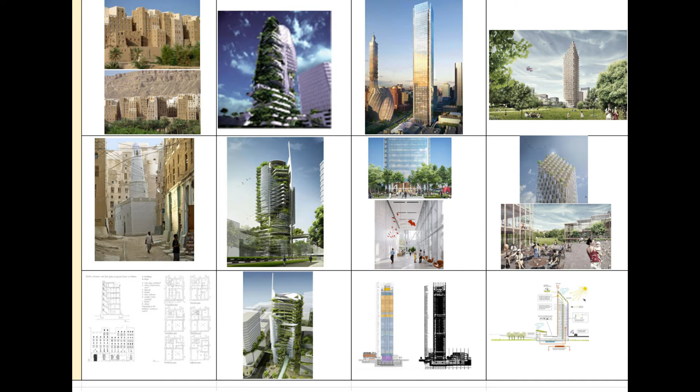So this study discusses high-rise and sustainable development. Besides this, a discussion of green skyscrapers and transportation. Moreover, we'll explain more about green high-rise and public spaces, and social and ethical issues.

So the abstract: high-rise buildings and skyscrapers have become increasingly important in the development of urban planning and environmental challenges. Many ecological factors have been included in skyscraper design. However, they still need to be more efficient to be labeled as eco-skyscrapers.

As a result, this study clarifies the tendency of architects like Norman Foster, Yeang, Renzo Piano, and others who are attempting to achieve the concept of green skyscrapers. These architects' work demonstrates structures as well as the function and energy efficiency of these skyscrapers. Furthermore, these concepts will be contrasted to Shibam's mud skyscrapers, which are simple Adobe high-rise buildings.

Furthermore, as a future case study, Sweden's timber tower ideas will be added to prior instances. This study shall go over many ecological criteria of green skyscraper design case studies, such as elevation technologies, skyscraper construction efficiency, renewable energy, water consumption and recycling issues, air ventilation, and so on.

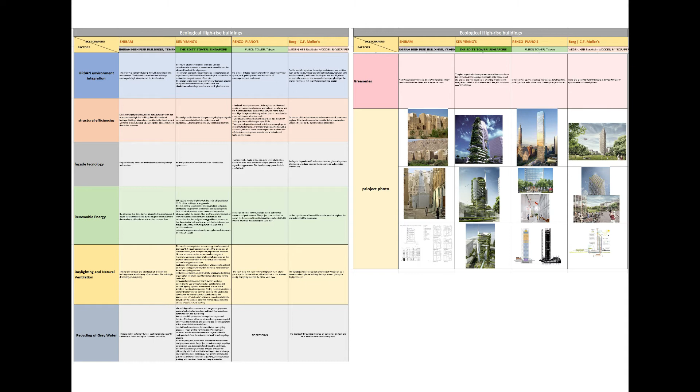So as shown here at this slide, the matrix shows previous factors within the table for various case studies. At the left side of the matrix, there are the ecological criteria for each project, and at the bottom of the matrix, the main images of each project. And here's the body of the article as it's shown in the slide.

So the research method: there is a need to employ ecological tactics to achieve the concept of eco-skyscrapers and to understand how they are created and create an eco-environment. As a result, the research approach should be an analytical one that involves numerous processes. The initial step is to examine several aspects of selected case studies relating to this research to collect the required strategies using their methodologies.

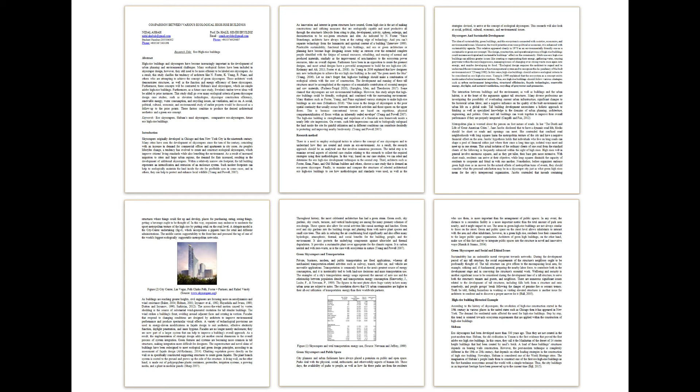Now we'll start to explain about the design, starting from the location of the proposal. The site is located in Palestine at the northern part of Jerusalem city. Jerusalem city is one of the major points of the Palestinian-Israeli conflict.

Thus, the location of this project touches a political debate which is reflected at all of countries at the Middle East region. The main site is close to the main road that connects the eastern part of the city, which is occupied by Israel, with Ramallah city, which is located at the Palestinian Authority boundaries. Moreover, the site is close to the main spine of the tramway transportation line and close to the industrial area.

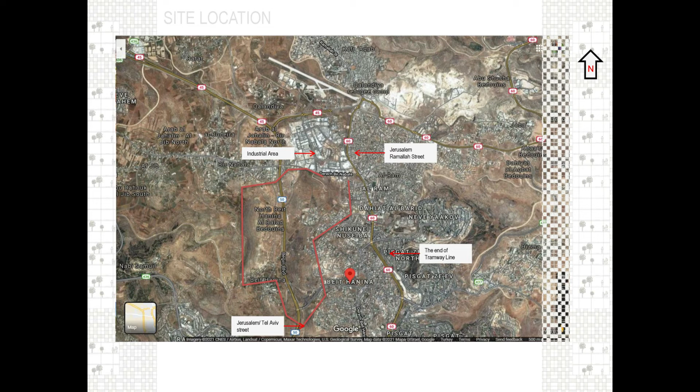Furthermore, the main road which links the western part of the city with the other occupied Israeli cities is located at the lower point of the site. So the site could be considered as a center between main Palestinian neighborhoods and link them together. Besides, this site disconnects the link between various Israeli settlements in the city.

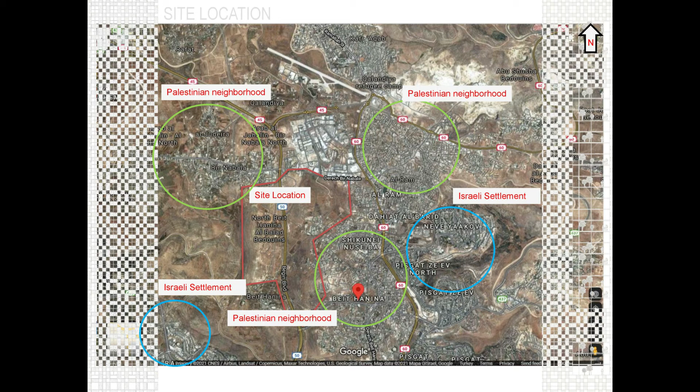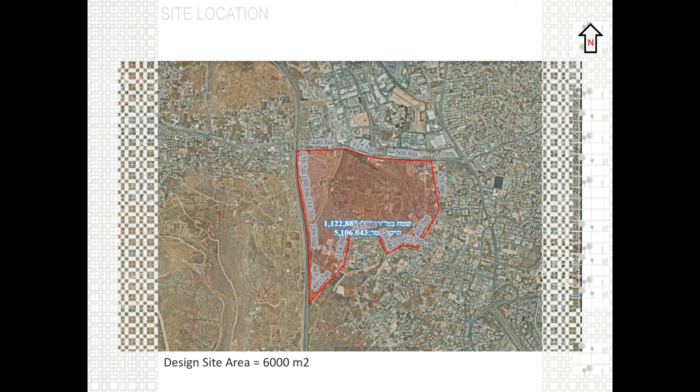The area of this general site is around 1,122,887 square meters. An area of 250,000 square meters of the site has been divided into a grid, containing a lot of plots.

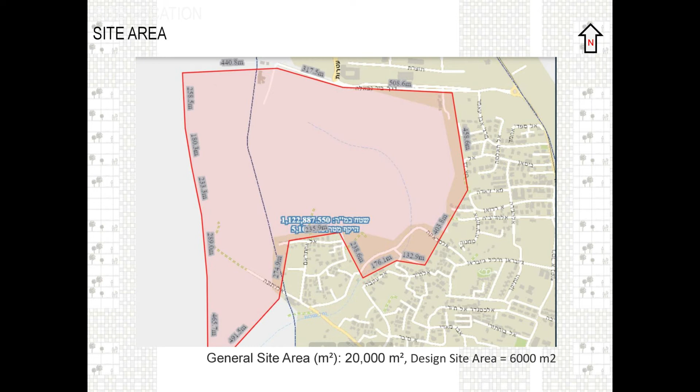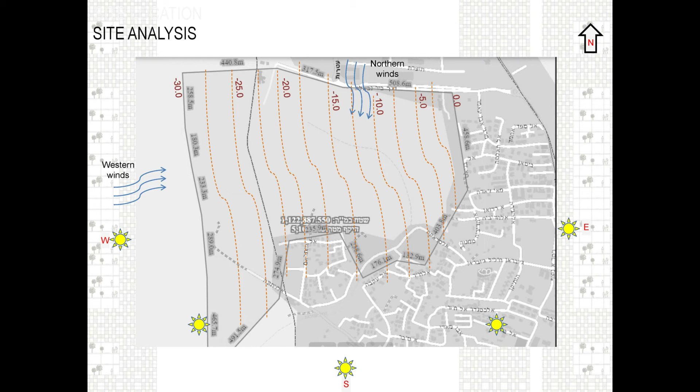The wind enters the site from the northern and western sides. The site is exposed to sun rays most of the year, from March till October.

This project should serve at least 300 families in Jerusalem City. Besides, this project should be completely sustainable, starting from the ecological criteria applied in the project, such as recycling water, saving energy, dealing with daylight, greeneries, and else.

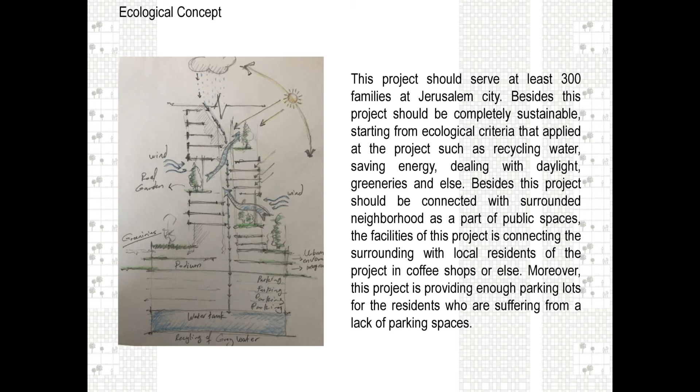This project should be connected with the surrounding neighborhoods as part of the public spaces. The facilities of this project connect the surroundings with local residents through restaurants, coffee shops, and else. Moreover, this project provides enough parking lots for the residents who are suffering from a lack of parking spaces.

So it's not only about the form or design of the building attached to the ecological needs of a high-rise building, but also the design of the facade should be designed in a way that gives a new landmark for the city.

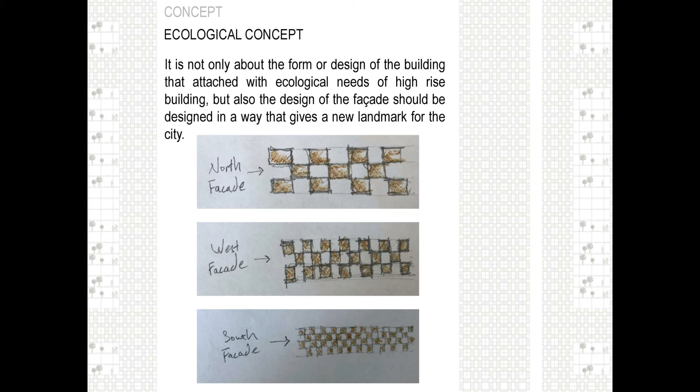The facades of the design depend on sliding wooden panels in a horizontal and vertical concept, to increase or decrease sun rays and ventilation according to need.

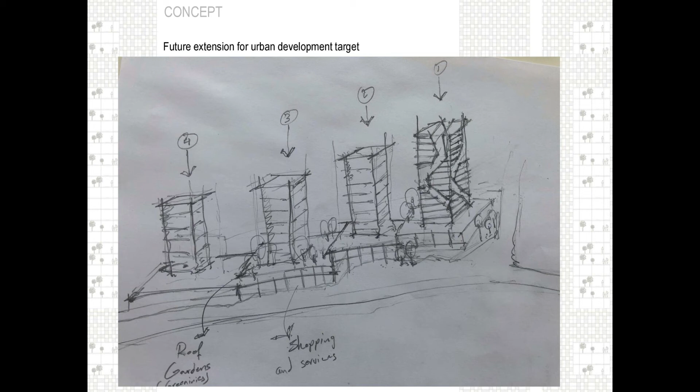The distribution of the future extension doesn't only depend on the divided grid we talked about before, but also on the slope of the site, starting from 0 up to -30 at one module, as mentioned in the site analysis.

For the program, starting from the bubble diagram, it shows firstly the main facilities relation of the project, like child care, management and services, restaurants, cafes, fitness and gym, marts and shops, and also the residential units below.

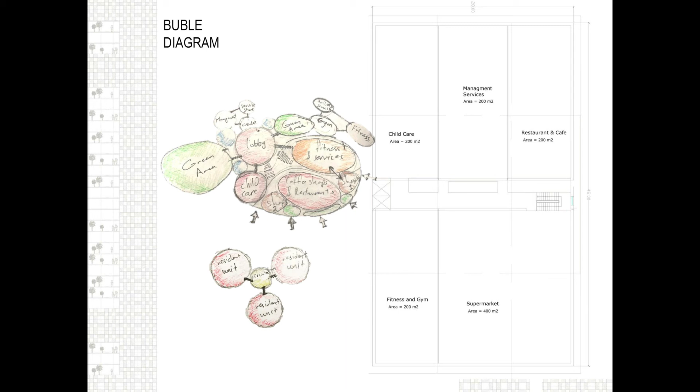For the general description of this project: stories above ground are 34, and stories below ground are 4. Structure is wood and glass for facade cladding, and concrete for the main structure.

Residential units area ranges from 100 to 120 square meters, with each floor containing 4 apartments. The area of the tower without the podium is 17,000 square meters, with 4 parking floors, each around 2,850 square meters.

The podium contains facilities as explained in the previous slide. For the residential units, there are two types: 120 square meters and 100 square meters.

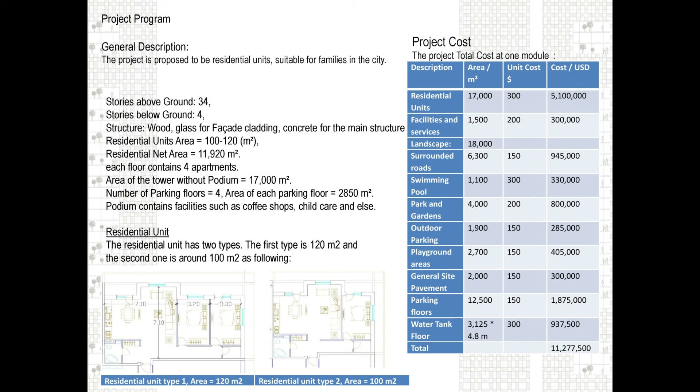Let us explain more about the drawings and details of this project, starting from the residential typical floor plans, which show the garden that gives life to each floor.

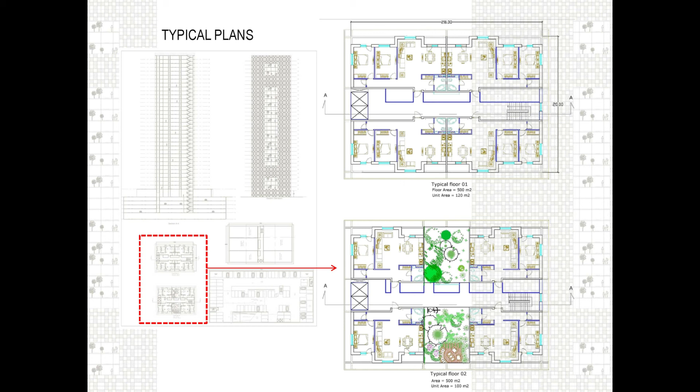The first typical plan has an area equal to 120 square meters, and the second typical floor has an area equal to 100 square meters.

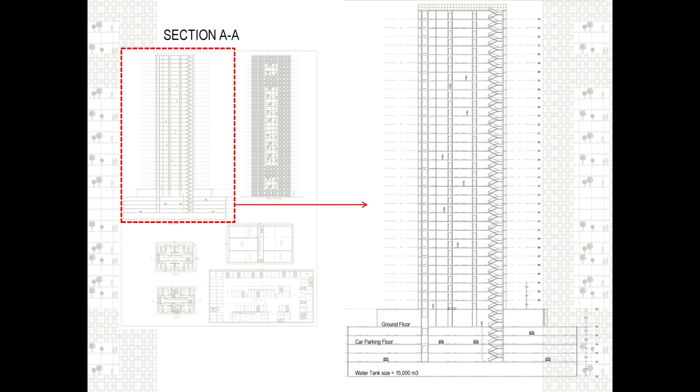The elevations show how we can rearrange the pattern of the wooden panels. Besides, it shows the solid and void that appear in the elevation.

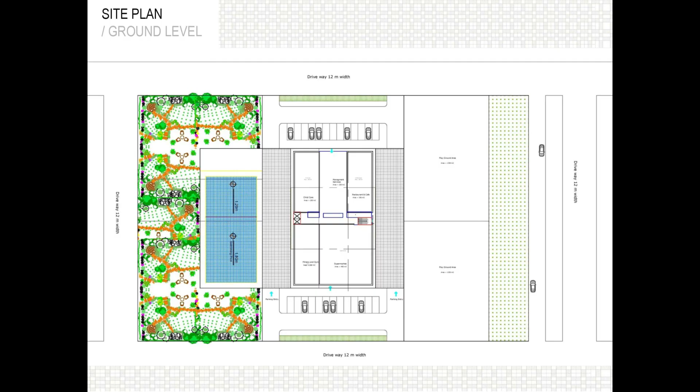This site plan could be repeated at the future extension, as shown here at the grid. At the end, here's a general image of the wooden high-rise building that we have designed.

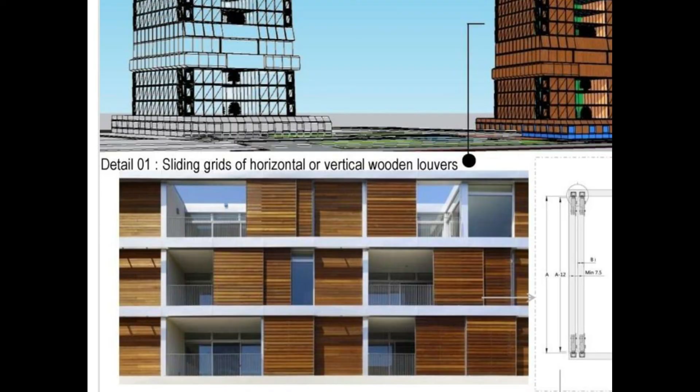At detail 01, sliding grids of horizontal or vertical wooden louvers appear here. Detail 2 shows how the vertical wooden louvers are fixed and rotating. Besides, detail number 3 shows the case of louvers at fixed parts of the project.